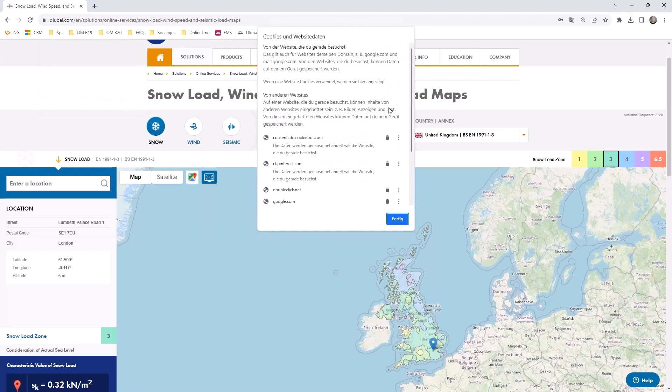So this is data saved on the computer to quickly access a page, but it might be necessary to reload it. Then you can select if you want to allow all cookies again, and the frame should load again for you if it did not do before.

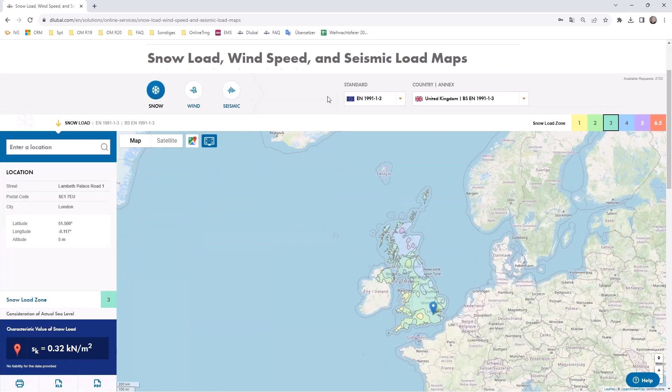So let me quickly sign in so that I will have enough requests for today. And let's go again to the snow load map. I think you're already coming to it.

It is not available yet for every map. I do not think that it is available for Great Britain. Oh, it is already - in my tests it was not available. Okay, so we can use, for example, Great Britain with the Eurocode 1991-1-4.

And then you see the small button on the left bottom of the page, which is still announced as being a beta. So please double check the values if they are correct, you can do that in RFEM, or at least be suspicious if they might be correct. It's still in beta mode, but we do not want to not present it, so you can think about using them.

So if you once click on the button, you can already see the three diagrams you can now gain. It's not only about the basic wind speed - you directly jump into the map and parameters according to the Eurocode, and it will create the diagram over a certain structure height.

So if you would adjust to over 20 meters in here, you would see that the diagram will of course be adjusted, and you can as well jump into the wind profile tab in order to copy paste the values with the level.

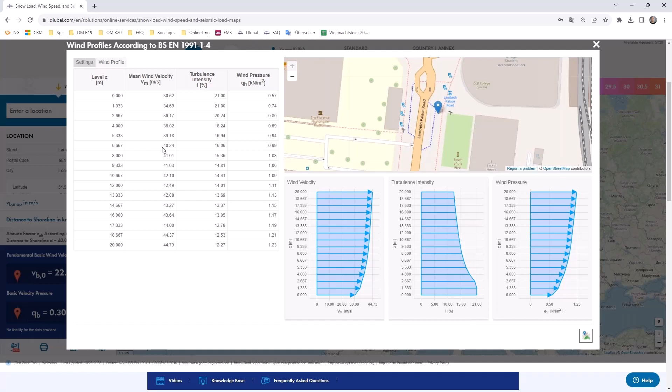What is then necessary if you jump into the RWIND main program is the definition of the wind profile and turbulence intensity profile. You can also choose that you want to have a user-defined definition and adjust all the values you see in over here. You also get a closer look on the place where you are.

You can also switch off the map if you rather want only a big display of the diagrams. So just to remind you again, it's still in a beta phase, so it might not be available for every standard we provide, but this might be quite useful for you if you use RWIND without RFEM 6, or if you want to compare your hand calculations, or if you want to compare our calculations and tell us something might be wrong or not.

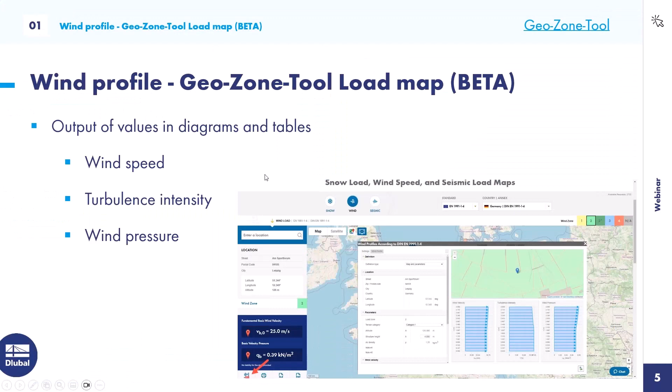So this was something not directly linked to RWIND. Let's now jump into the main part, our program RWIND. And this is my summary of the four features I would like to mention.

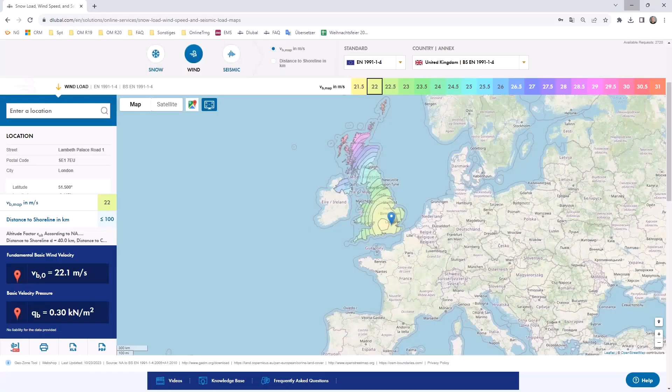Maybe you are not yet used to it, but you can also find all the data in our extranet. So if you log in with your account and go into the development tab on this page, you can see features and also bugs. This is most likely the place where you can inform yourself of what is new or what was fixed.

And if you then restrict it to RWIND - this is in German, depends on the language set in your account - you can see that these features were introduced into the 4th version or the 3rd version and so on. You could also check into the bugs which were fixed for certain files.

So what I would like to talk about now is the first feature, the generation of zones from RFEM surface numbers. The next one will be the support for verification or experimental data - this will be the main part of today's webinar. The next is a new scaling function for the wind tunnel optimization, and last but not least, we will quickly step into the display of maximum and minimum values in each time step. I have one slide for each feature, and then we jump into a small file in order to check where you can find it.

So you are now able to generate zones directly from RFEM surface numbers, of course only if you use RFEM 6 and then hand over the model to RWIND. We will now also hand over the surface numbering, and then you are able in the edit part of RWIND to generate zones from surface numbers.

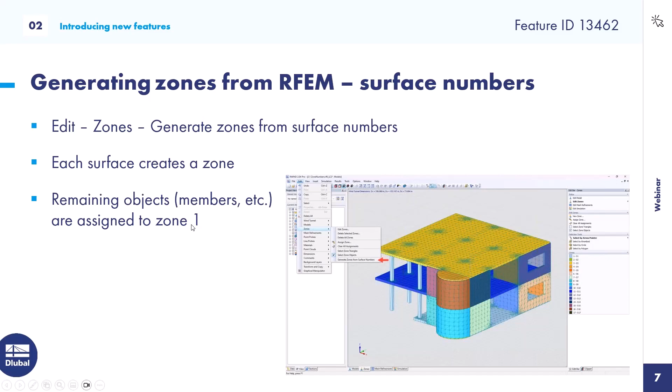Each surface you can of course split as much as you want in the RFEM main model will create a zone, and remaining objects - so you may also hand over members, they will also have triangles - will be assigned to zone 1. So that's a bit of a complication, that they are assigned to zone 1.

Let's step into my example file, also installed, the concrete building where I switched on the surface numbers. You can see we have surface number 1. If you do not want that surface 1 also includes the member triangles, you just have to go into the table and insert a row, so the surfaces will not start with 1, and everything else will be synchronized in the back.

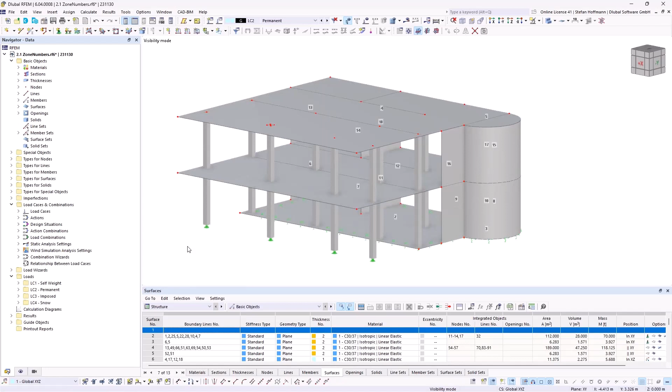Now we have surface numbers starting at 2, and everything else may be handed over to zone 1. If this is not fine enough for your differentiation, we will also see it in the main example later on. You might also right-click and divide surfaces with intersecting lines in order to create multiple zones.

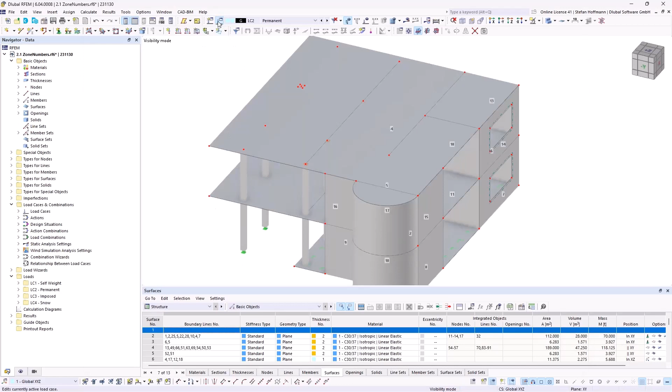So let's quickly create an example wind simulation load case. We will not care about any settings that are able or necessary to be taken. We will just open our model in RWIND, which can be quickly done by the button I used. So our geometry is handed over, and now there would be only one default zone.

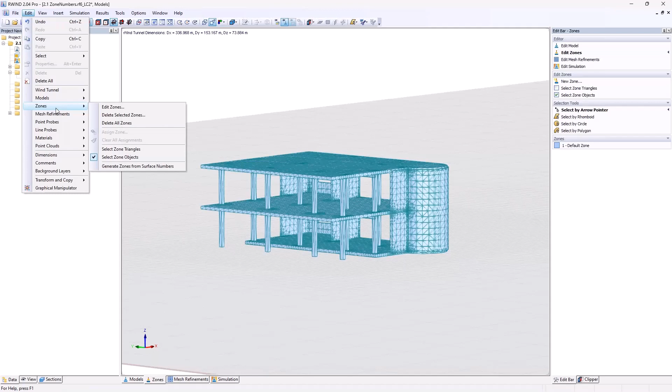It is possible for you now to hit Edit, Zones, and generate zones from surface numbers. You quickly see that there are now a lot of zones created, and you do not have to do that manually - you don't have to create a new zone and use the selection tools to gather all the triangles which might be necessary for your file.

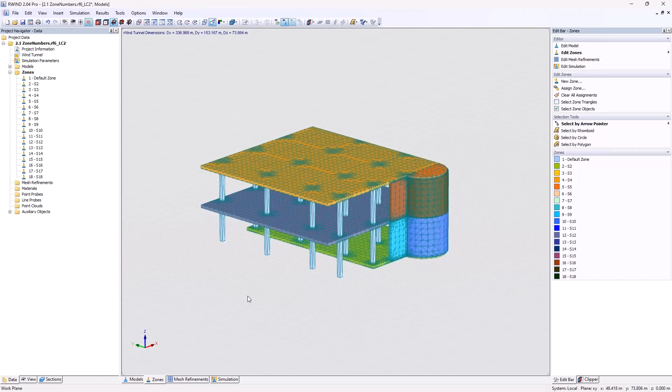If you already consider the surface numbers or a certain division in RFEM 6, you can directly create these zones in order to quickly evaluate, maybe, normalized pressure over a certain zone. I will later on show you how we use it on our monopitch roof.

As told, you can see there's of course also the default zone number 1, where you will be able to find every other stuff which is not related to a surface number.

Okay, so this was the first feature I wanted to talk about. We will use it later on in the next example. So let's close everything and go back to my presentation.

The next one is the support for verification and experimental data. We now offer the possibility to enter verification data into the table. This is linked to point probes and pressure values, which you can enter. You can then display the data in graphs using labels, the normal point probe labels, but you can also do a graphical representation of the differences between the verification data and the simulation results.

You can switch that in the result navigator. You can also choose about the extrapolation of the data on the surfaces in RWIND using two methods, which are introduced and explained in the manual. You can also restrict the verification data to be extrapolated to a certain zone, and we will later on use that in my main model.

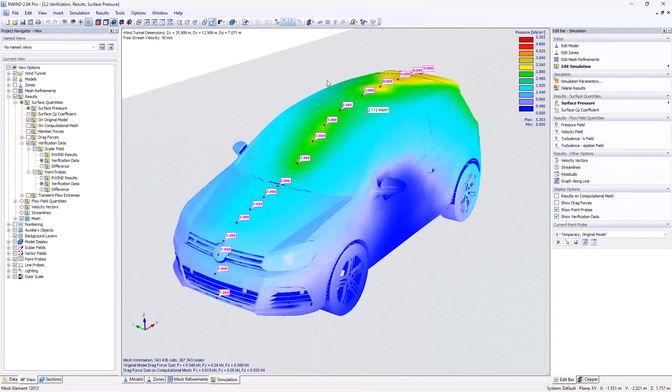But in order to introduce the verification data first, I use the Volkswagen Golf, an example already installed with RWIND. I have already defined a point probe and activated the option for it. It might be, of course, a bunch of probes you want to enter if you want to define certain values for zones. We only did one point probe here, and if you activate the verification data, you get one more table over here where I have entered random values.

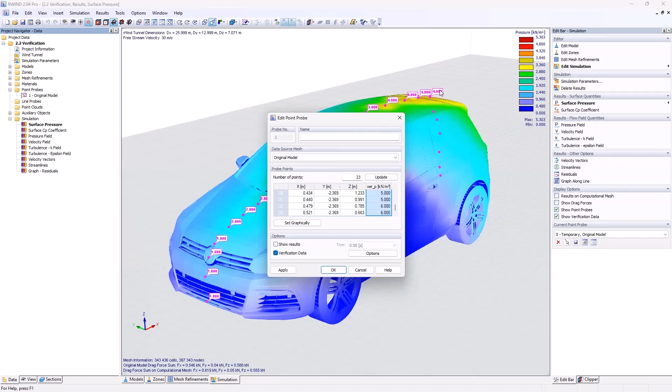So they do not come from any tests - I just wanted to show you the labels so you can quickly estimate where they are and what they are doing. Then you will also be able to adjust the verification data options.

So you can choose about the interpolation method, which is yet fixed to all point probes - you cannot yet differ between Gaussian interpolation or diffusion - but you may set a different data range constraint for certain zones. We will see that later on in the other example. If you do not know about Gaussian interpolation or diffusion, you can just hit F1 on the keyboard, and usually it should be linked, but maybe we did not yet do this.

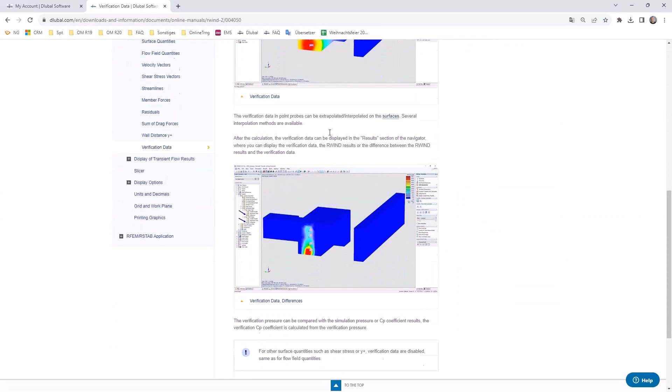So you can quickly search for verification, wait some seconds, do not wonder if you do not need to hit enter, and then choose the topic, which may be about verification data. So there is some general part of it.

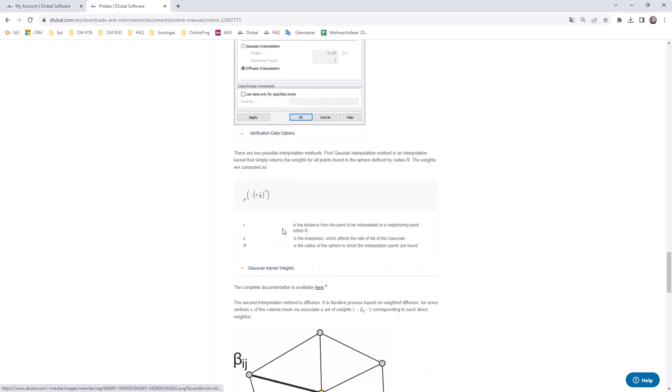And if you go into the probes, we quickly search it, then you can see the explanation about both interpolation methods. Just scroll down and you will find the information about the second interpolation method, or also about the other ones. We will not go into the theory behind it now.

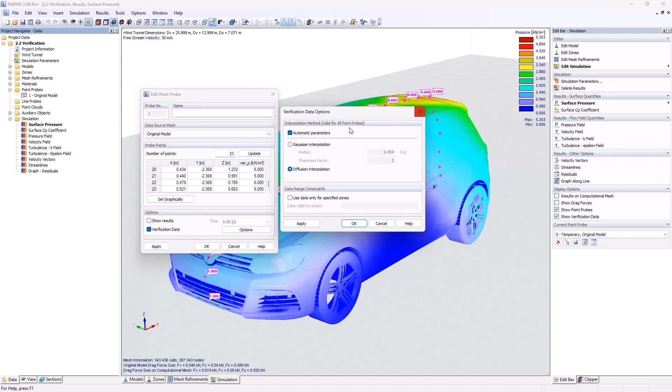What I do remember myself is that this will most likely diffuse interpolate about a whole area in slides, and with the Gaussian, you can set a radius which will interpolate, but we will once again later on show that.

And if you have these results, you can always differ between the verification data of the scalar fields and the point probes. So you can step over and show the results you get from the numerical wind tunnel analysis, and then also switch to the verification data. I think the biggest influence will be the difference, so you can directly check.

According to the colors, how far is our calculation maybe away from the standard, which does not really mean it must be far away from the reality. There's always the question, how can we verify our model? From my proposal, every FEA or CFD analysis needs to be verified by a wind tunnel experiment, and then you can enter the data and check if the assumptions in this complex CFD analysis match with reality.

We will later on use that feature once again. So the next part is the new scaling function for the wind tunnel optimization. You are now able to define scaling factors to automatically adjust the dimensions of the tunnel, and you will be able to save the user-defined scaling factors.

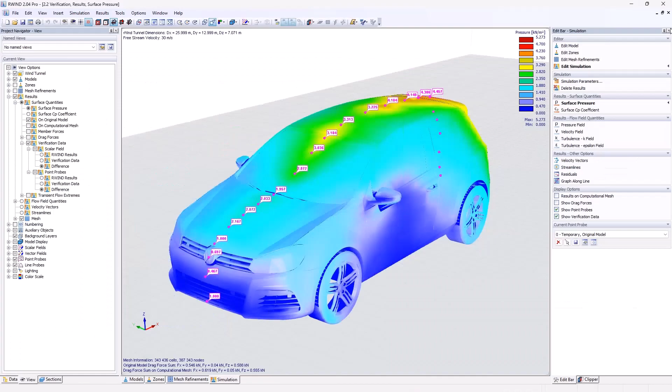Let's quickly jump into the example, which is once again the Volkswagen Golf car. Then you usually double click on the wind tunnel. Let's zoom out a bit, and see these automatically adjusted values.

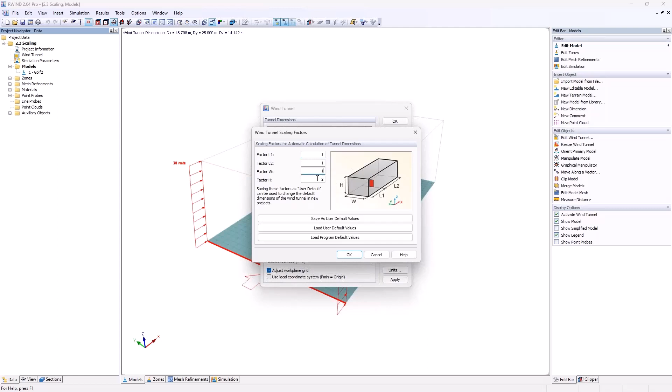Then there is a button for the scaling factors where you can now define your own values. Usually it is multiplied with the normal values you have in the program. So this is the wind tunnel the program will offer you, but we propose, most likely if going into a more detailed calculation, a recommended wind tunnel size.

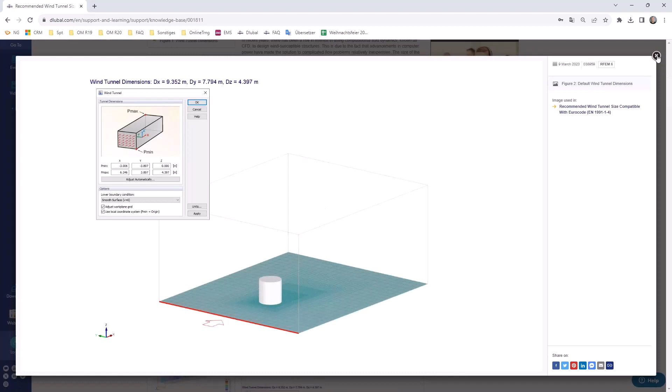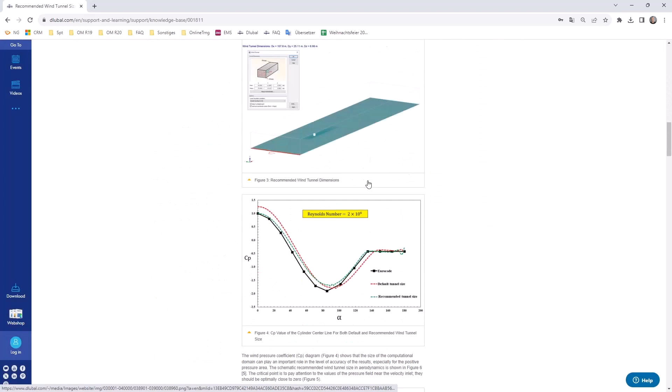I already mentioned this technical article by Mr. Katzemian in a different webinar, but I would like to put some effort into it again, because it's quite necessary to think about the dimensions. If you compare the standard dimensions to get a quick estimate of the wind load pressure and the recommended size, which of course extends the calculation time a lot. If you want to compare values to the Eurocode, you can see the size will be much bigger.

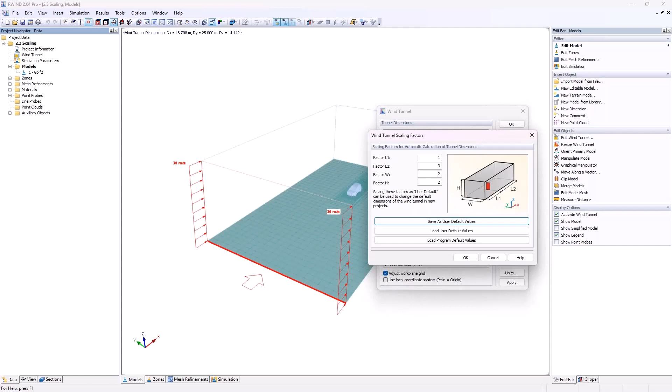I did a quick estimation of what the values should then look like. If you would like to match the technical article, I do not like numbers with commas, so it would be 2.7 in this length, 1.6 in this direction, and 1.85 in this direction. I would use 1, 3, 2, and 2, and hit OK.

Then you will be informed that these are just the factors used, and you have to use the adjust automatically button once. If you then hit OK, you can see it did not change a lot because I think it was already bigger in front, but your wind tunnel will be adjusted according to the factors you enter here.

So if you put 10 inside it, say OK, and adjust it, then you can see that this factor is going to be increased a lot. This gives you the possibility to not think a lot about meter values, but to quickly enter your factors, save them, load them, and apply them on your model.

So the last feature I would like to present today is the display of the maximum and minimum values in each time step. This means it is for the transient calculation, limited to our RWIND 2 Pro version. It will offer you some kind of envelope for surface pressure or CP coefficient values.

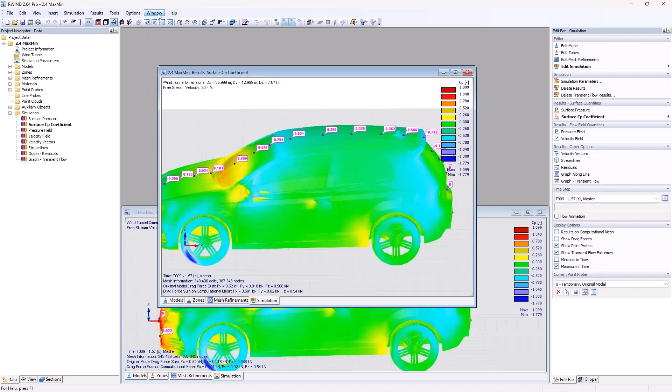So let's jump once again to the golf car. There's also a transient calculation file for the golf car. Usually if you do not show the transient flow results, you will have a slider over the time where we can see, most likely on the back part of the car, that the pressure will of course change over time, due to the wind acting, of course, turbulent.

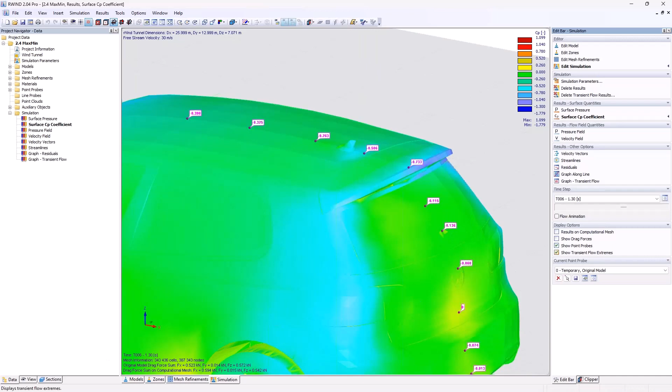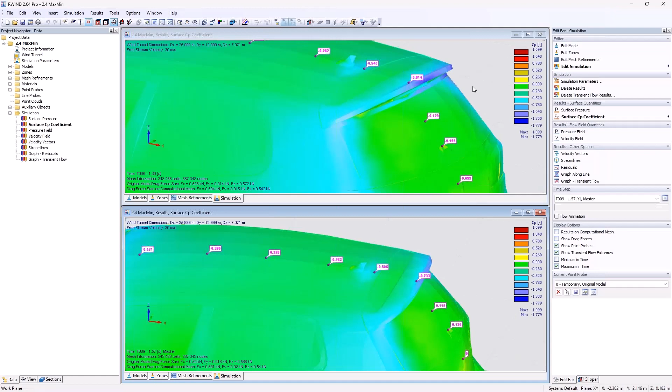Or if you are lazy and don't want to check that, you will now be offered to show the transient flow extremes. If we use 2 monitors, we can show the minimum in time, which might be minus 0.814, so it's the minimum with a minus. And we can also choose to show the maximum in a time. So this same point probe in a transient calculation over time would gain values of minus 0.733 or minus 0.814. So this is one way to determine the maximum or minimum values for your structure or your file.

You can also switch that value in the view navigator, but I think the quickest way is to do it on the right.

Okay, so this was kind of a slide presentation, but also stepping into the program. Now I would like to show you how we can use the feature of the verification data on an example. It's a building, 10 meters long, 8 meters wide, 4 meters high, and it has an angle of the roof of about 5 degrees. So it's a monopitch roof.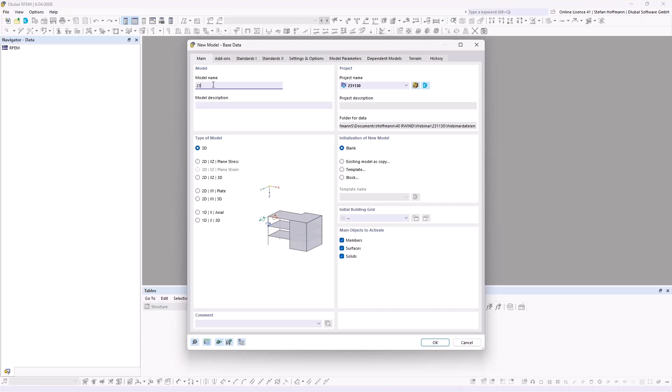So we will start with a fresh model in RFEM 6. Let's give it a name, so it's the name of today, and it's called monopitch.

What we need to activate - we will not do any design to elements, so it's just really about giving our model into the wind simulation analysis and gaining the pressures from it. I will only activate wind simulation. I could activate all because I'm working for Dlubal, so I'm not limited to any add-on, thanks to that. And we will do it according to the German national annex, because we are quite used to do so, and we also tend to present our English webinar for the German annex.

What you can now also do is choose a location in the GeoZone tool if you want to - we will do that later on. And you could also define a terrain. Just remember, it is possible, but since we would not like to have any influence by neighborhood or by the terrain, we just skip that.

So once the file is loaded with all the data used before, remember that the first angle of wind simulation load is going into the global X direction. So I tend to rotate my model because I dislike to rotate the wind load.

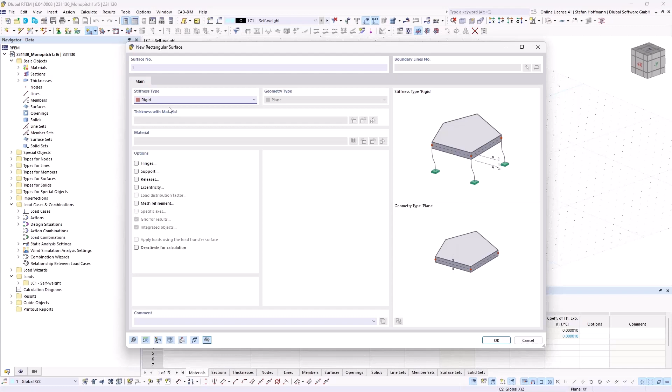And I will now start by modeling the bottom plate. I will simply use the rigid type because I'm only interested in my wind load on the structure, not in any design yet for the building. So it does not matter if it's concrete or metal - we can just use rigid because I do not account for any stiffness.

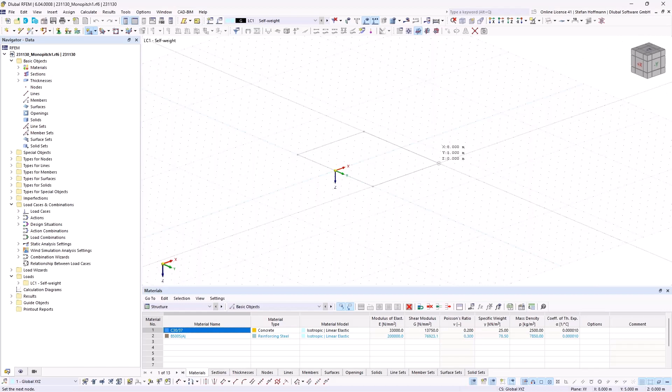So now I told that it is 10 meters times 8 meters. So we would now need to define this size in our program. So where did I choose it? I'm starting at minus 0.5, and we're going to 5 and 8. So this will be the bottom plate.

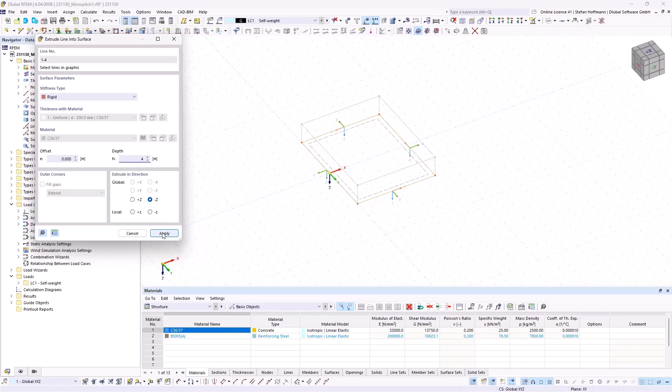Then we can simply, with the control key on the keyboard, mark all the lines, right click on them, and extrude them into surfaces. This will offer you the possibility to quickly model a surface. We will once again use the rigid type and the height should be 4 meters into minus z. We apply that, and we most likely have our hull already.

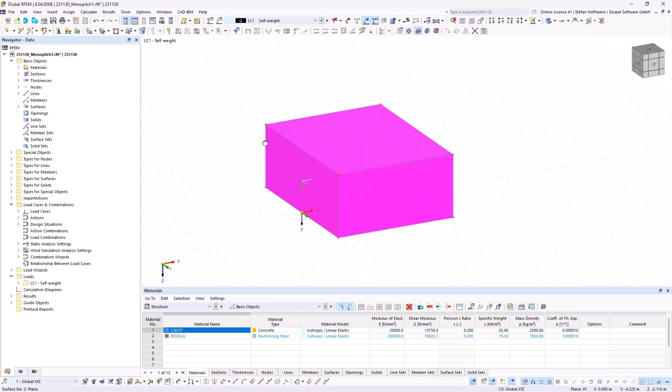You can of course switch into this display if you like it even more. Then I would just mark my bottom surface and copy paste it with the control keyboard and snap it to the top. We of course need some boundary conditions at least, so I would just apply some line supports, being some singular foundation on the length. And then it's of course about to define the angle.

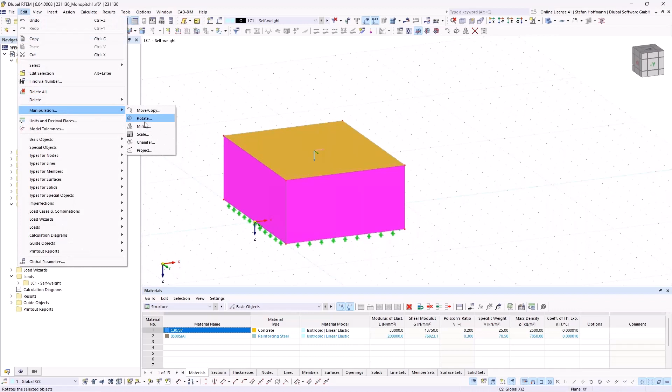You can quickly do that by simply hitting the surface and using the manipulation tool to rotate it. So you can now decide that you want to rotate it, for example, 5 degrees. Due to our wind load assistant, I use 5.01. And then we need, of course, to think about what will be the direction.

So it is about our y-axis. This is the turning point, and it should be into the z direction, so we want to have it into the global z direction. Since we use this point already, you don't need to choose it, but we can of course choose a node in here. And if we hit OK, it is moved.

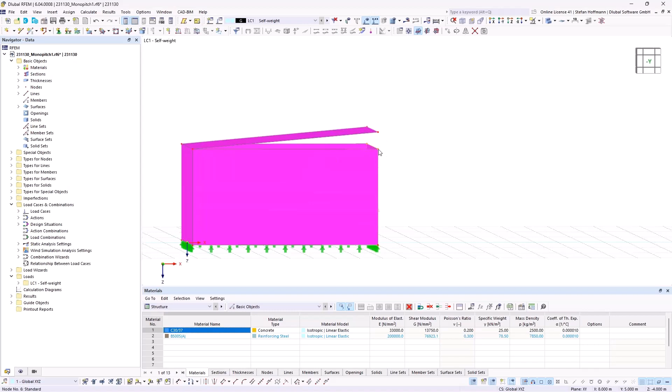Since I only selected the surface, all other combined elements are not moved. So we could simply mark everything before, or we now just mark both nodes and drag and drop them to this position. Then you can see that the surfaces are quickly adjusted. So it's quite smart if you would like to model this close to a CAD design, I think, since you can use drag and drop and so on.

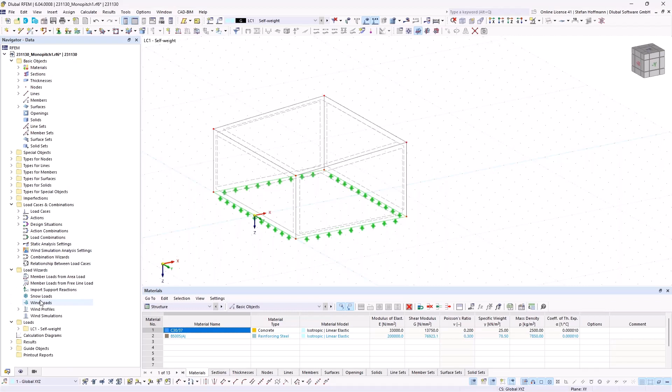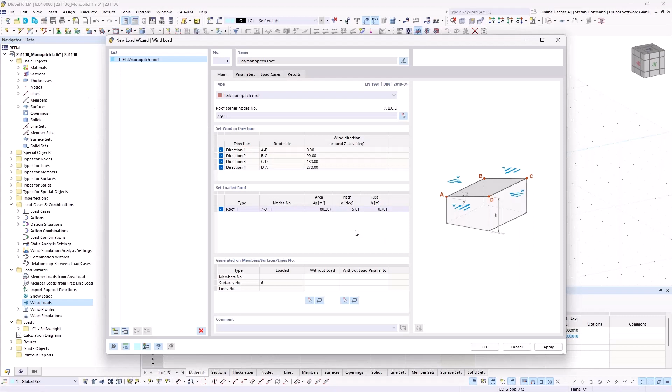So the next thing we would like to do is, of course, to check the wind load areas. We can do that with the wind load wizard. This is not RWIND, this would be the standard approach. We are now only interested in the mono pitch roof, and then you see the picture of what 4 corner nodes you need to choose. So we simply pick our 4 corner nodes and hit OK, and then we introduce the parameters.

So now I hit the button to jump into the GeoZone tool, and I will use the location of Leipzig. It does not matter where we are. You can see that the German standard will choose wind zone 2. I will load all the data, and it will gather all information from the GeoZone tool, so we do not need to enter it manually.

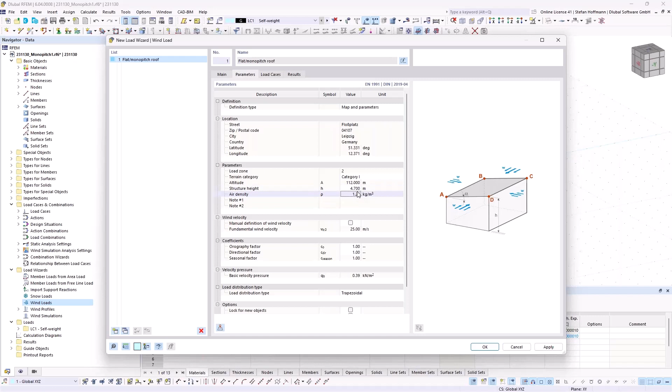And then I can adjust the structure height, which is roughly 4.7 meters, and we will use terrain category 2. If we do that and create all the wind load cases, we can quickly estimate the results already.

So you see the load directions and you see that our zones will be split. If we jump quickly back into this part, we will be given all the data that the standard provides. So the width of zone F, so E divided by 4, is 2.35 meters, and E divided by 10 is 94 centimeters. So you will be given this information.

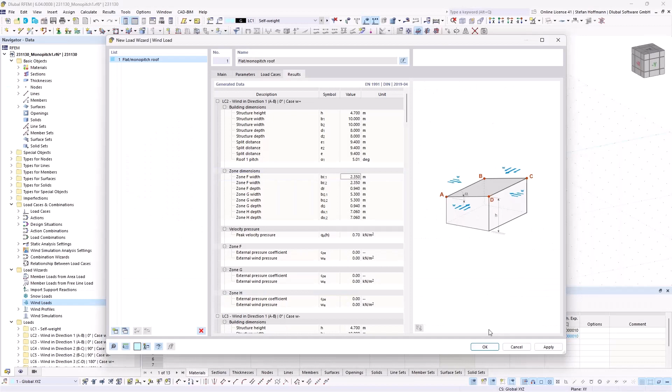This is why we do it as well, shortly, with the load assistant. And if you display it, you can see that this is the load or the suction we are going to experience in our wind, and we will then check it.

So let's continue. What we now want to do is already define zones, so we would like to split the roof into parts. For that, we would like to have our lines showing into the same direction. So now we can use both lines, hit the right mouse button, and divide the line via distance.

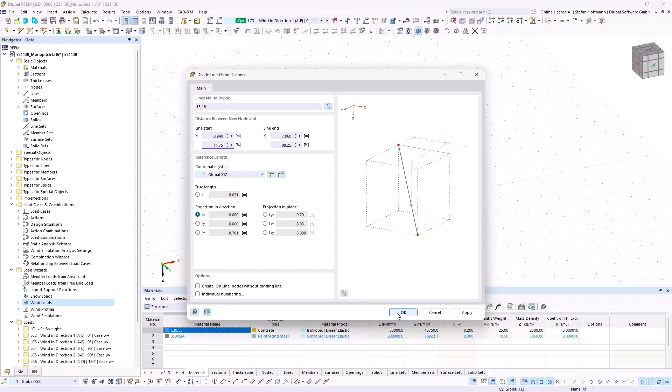So now we could just simply enter 94 centimeters, but it is meant as a projection showing from top. So you are now able to use the projection of the line into the local X direction. You can enter 94 centimeters in here, and if you do that and hit OK, you can quickly divide the line using it for further modeling. We will now simply draw a line into here and have the line which is going through, and then I told that the distance will be 2.35 meters.

So we will use this line and also divide it with a distance. It's not about the projection, since it's the same either way. We'll split the line at 2.35 meters, and also divide the line at the distance at the end, 2.35 meters. So now we can simply mark this node and copy it from this point to this point.

Or you can try to hit the tool in order to snap the perpendicular part, though I'm not sure if I activated it. So I'll just simply use this line as well and copy paste it over here.

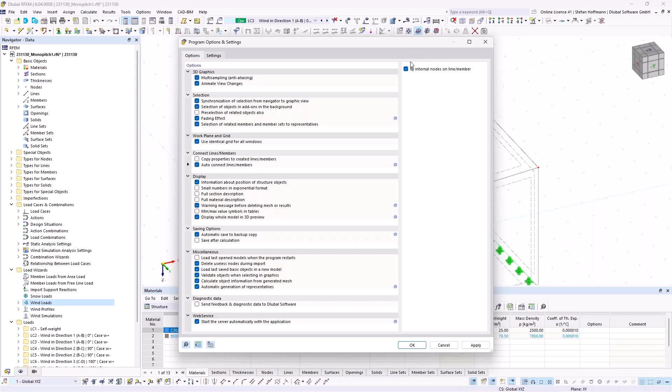If you're curious why red or blue nodes are created, whether the line divides or not, you can step into the program options and choose the setting for what it's supposed to connect, members or lines. If you don't manage to do so, you can later use this function, go over and check if the lines will be divided.

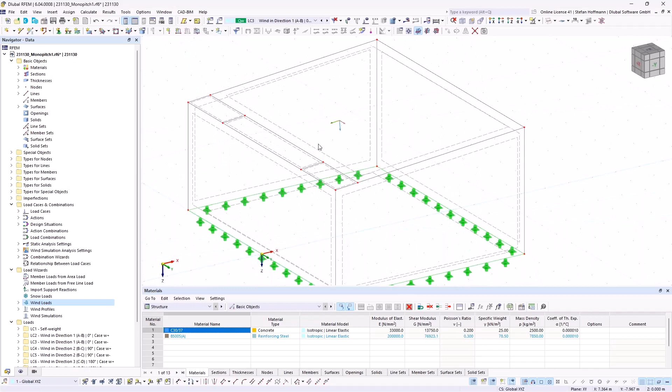So the last part we need to do in order to have certain surfaces is to right-click on the roof and divide the surface with intersecting lines. And voila, we now have 4 surfaces for the top, giving us 4 zones as expected, which is what we'd like to compare with our experimental data.

So this is a way, one possible way. If you have a quicker one, of course you can also use your own way of modeling.

Next, for the wind analysis, we need to step into the mesh settings to check what wind simulation options we'd like to use. You can think about the level of detail or simplification of the model, and about only visible objects being handed over. Since we don't have members, we can just deactivate this option.

We will also not hand over any terrain, and we will also not hand over any surrounding models.

Since we use rigid surfaces, we don't need to think about surface thickness. Running RWIND in silent mode is mainly useful if you have a lot of load cases and don't want to double check them or manually start the calculation in RWIND each time.

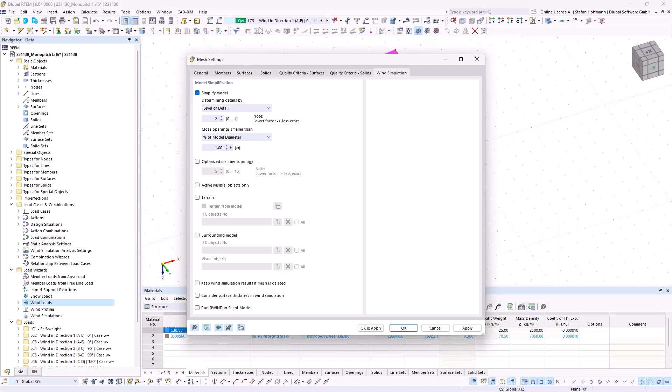You can disable this button, and once you calculate a wind load case, RWIND will open and you'll be given the option to adjust everything you'd like, so you can double check the model and then start the wind calculation yourself.

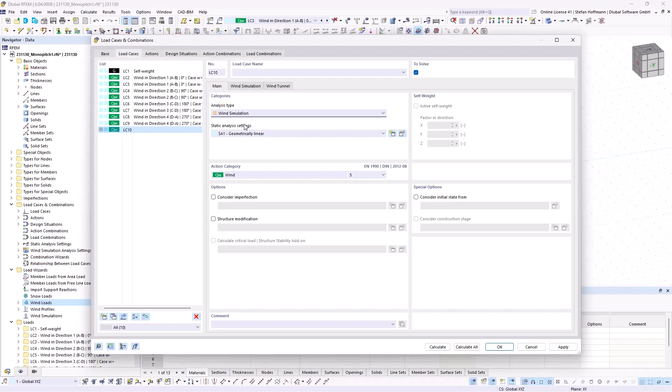The next part is that we need a new load case, of course. It will be the action category wind, with the analysis type wind simulation. Then two registers will open on top, where you can choose further settings for the wind simulation.

So the first one would be the wind profile. If we step into it, you can see this is once again related to a certain location, so we check Leipzig again in order to load the data inside it. You can also manually define it if you want to.

We would just change to category 2. The height is taken automatically by the program, and we will not adjust any other factor inside this. There you can already see the profile, which should match the ones I showed in the beta phase, though due to the beta phase there might still be some adjustments.

Using this button, you can switch between the turbulence and the wind profile, or you could also see the wind velocity given in the tables.

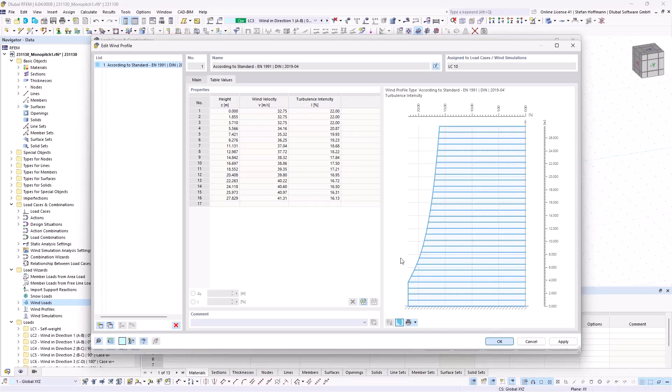Once defined, the last part would be to double check the wind simulation analysis settings. So whether you'd like to do a basic steady flow calculation or a pro transient flow calculation is always up to the structure and turbulence you're expecting.

We will simply do a steady flow calculation, using the presets given here. And if it's up to certain controlling standards, we would propose to also activate the boundary layers, but for this, please check out our technical articles, because Mr...

Kazemian did provide a lot of verification examples and also a lot of nice-to-know facts for maybe beginners in a CFD analysis, because we offer a tool with a quick estimation of results. There are still technical parts behind this you may be curious to know about.

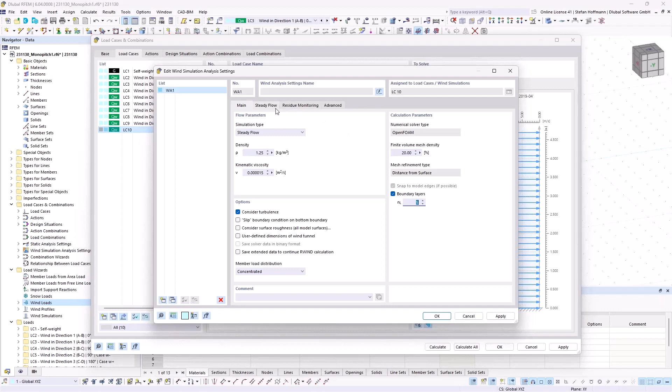There are other things you could adjust, but we will just leave it like it is. So if we now hit OK and start the calculation of LC10, you will see that it will now hand over our model to RWIND. It will start RWIND, and we would now be able to do the stuff we would like to do.

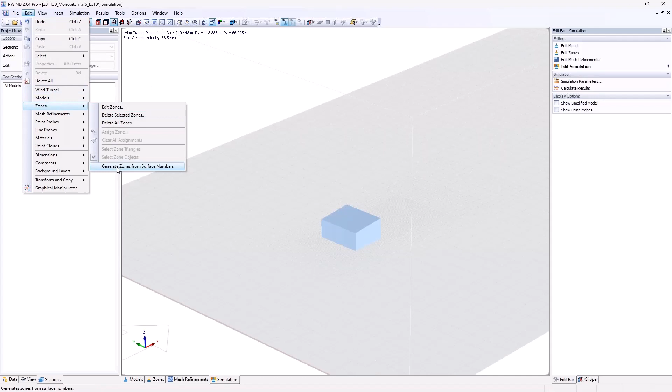So currently it would be necessary to manually generate zones from surface numbers that you can later on use. Of course, we are planning that there should be some automatic option, because usually it might be wanted that you would like to automatically create zones.

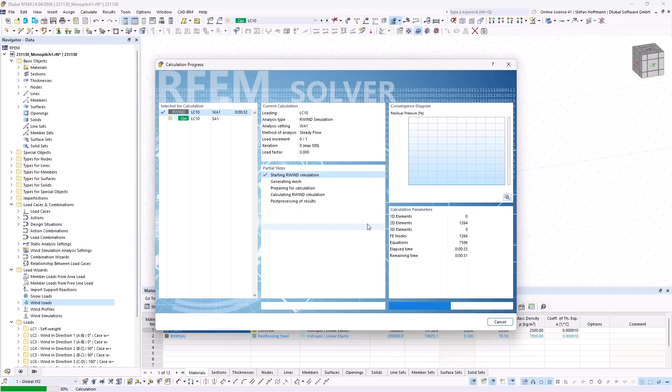If everything is done, we could now start the calculation, but since this will take 5 to 10 minutes even for this file, I will not do it live. I will open my already calculated file, so of course RFEM will give me some error. Okay, I did already run the file for you.

So let's make a jump into time. 10 minutes passed, we now already have our results on the model. Let me quickly just delete the line load I already defined in here. So we have already our zones being defined. Our zone, I always have to double check.

Zone 7 is the big part H, 8 and 9 is F, and 10 is G. I hope I will remember it. If not, I will have to double check it again.

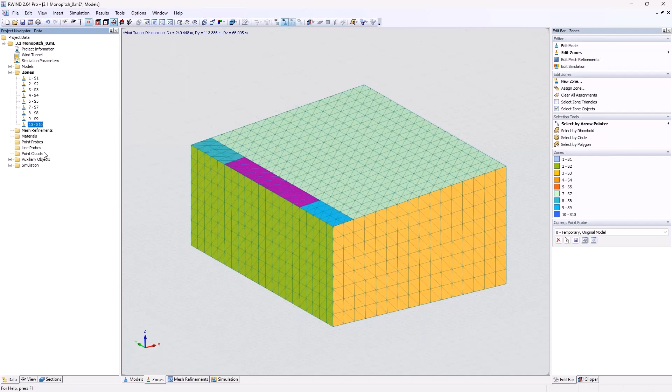So what we are given now after the calculation is, of course, the pressure for our front and our roof, sides, and so on with certain values. And now if you would like to compare that to different standards or to your analysis, we will define a new probe.

I will name it F for the zone F. So this will be these small parts in our model. And then we will define it on the original model, sorry, on the original model.

So the original model, if you are curious on what the model measures are about, there is a big chapter in our online manual, because this is one main part of RWIND: that we give maybe a non-topologically correct model from RFEM to RWIND. It will create a fine mesh for the CFD analysis and transfer back the forces onto the model.

So let's start by setting point probes graphically. We are now only interested in the roof, so the part F. I will use 2 probes over here. You will see them soon.

I hit finish, and then I will quickly switch to the RWIND results, because it was still set that we show the verification data. And then we can see that we have those 2 point probes giving the results at this point for our zone.

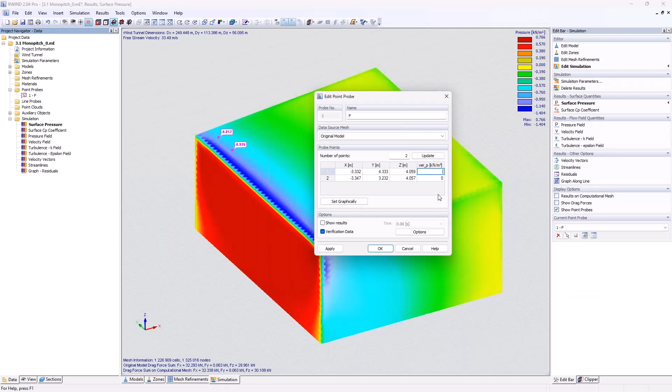And if we now would like to introduce verification data, we just apply this button and we will check what the standard is thinking of. So it's minus 1.19 kilonewton per square meter. So let's enter minus 1.19.

Oops. And quickly check that this will only be used now for zone number 8. And let's use the diffusion interpolation, say okay, and let's quickly switch the data to the verification data, because I think this is a smart way to see what the logic is doing behind entering these probes.

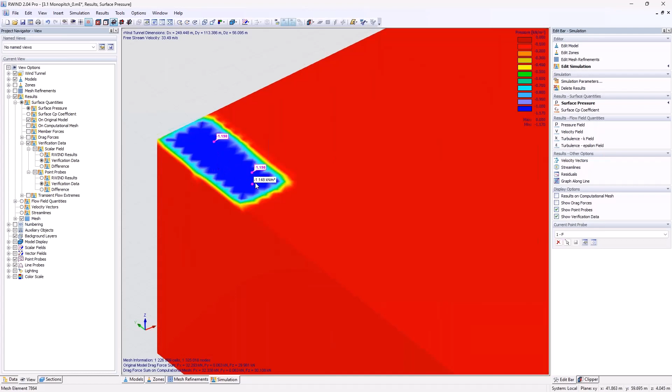We now inserted 2 probes for the zone. We restricted it to be only interpolated in this area. So what it tries now, of course, is to keep the minus 1.19, and towards the boundaries, to the other surfaces, it tries to interpolate.

We will now introduce some more points. So I will just enter one more in the other area, say okay. We go in there, it already has the latest value.

And if we would switch now to the Gaussian interpolation with a radius of 0.72, hit apply. Okay, let's put this window in here. We will see that nothing is done in here, because keep in mind, we restricted it currently to 8.

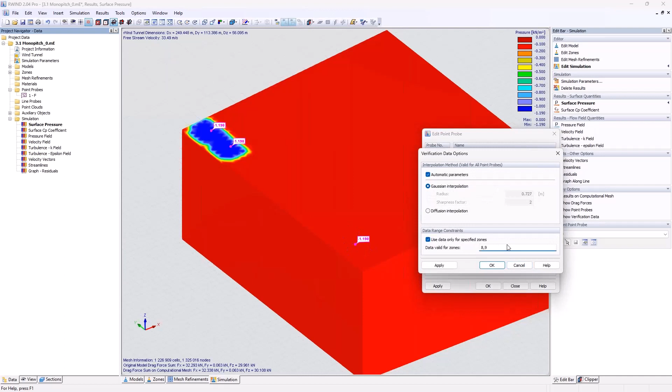We can also restrict it to 8 and 9. And then we see that the interpolation is done in a bit different way compared to diffusion. So with diffusion, it is using a wider area, and Gaussian is using the automatic parameter defined in here.

So it's a radius around the dot of 73 centimeters. We could also uncheck the button and increase or decrease the area, depending on how many probes you would like to set.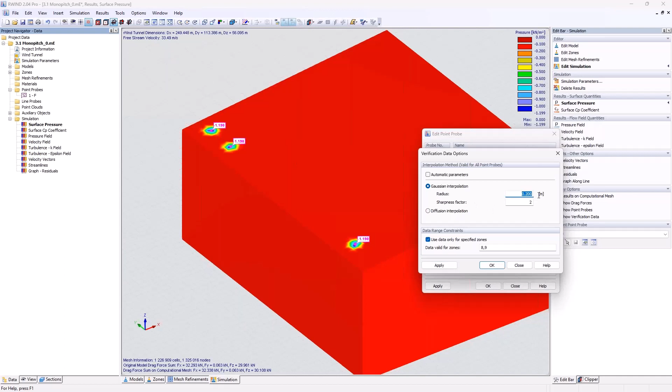In a normal wind tunnel analysis, in reality, you have a certain amount of probes over the height. Since this would extend my webinar to more hours to introduce such an amount of probes, we will only use 1 probe this time, and simply increase the radius, for example, to 3 meters, because this way most of the zone will be covered by my defined verification data, and all the other stuff will be interpolated. So we will set a new probe for the next area.

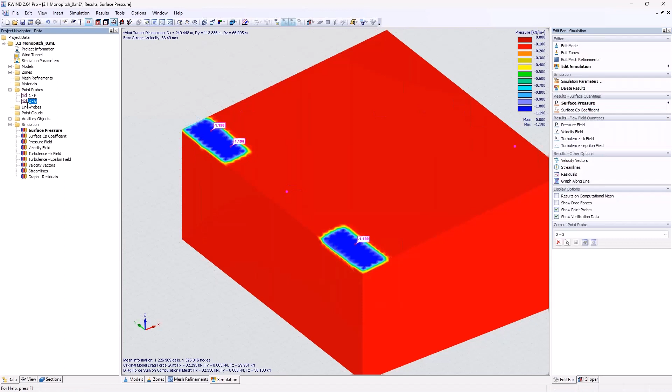So this would be G. We will set it graphically, once again only using 1 dot. It will be more usually... I set 2 by mistake, so let's only keep the first one we used. You can also later adjust the values we used here if you need to.

We will now once again define the verification data for this part. Let's jump back - should be minus 0.84 according to the standard. Let's enter it. As you can see, this part on top is limited for all probes, and we will define this probe only for part number 10. You can see that it will interpolate between the zones a bit better than before. So now we have already defined 2 parts.

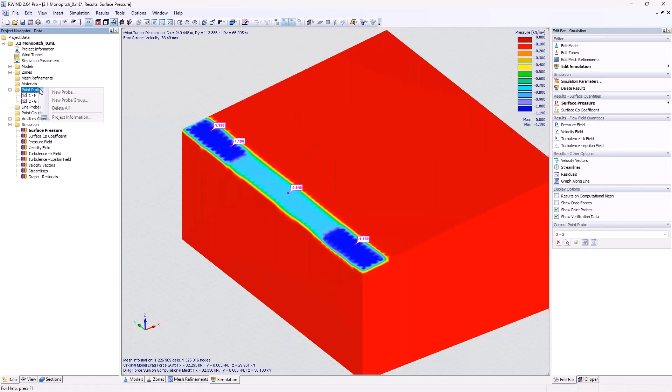Let's enter our last probe, which would be about the H area. Once again I only set 1 probe there. We define the verification data, which is supposed to have minus 0.42, and we assign it only for zone number 7.

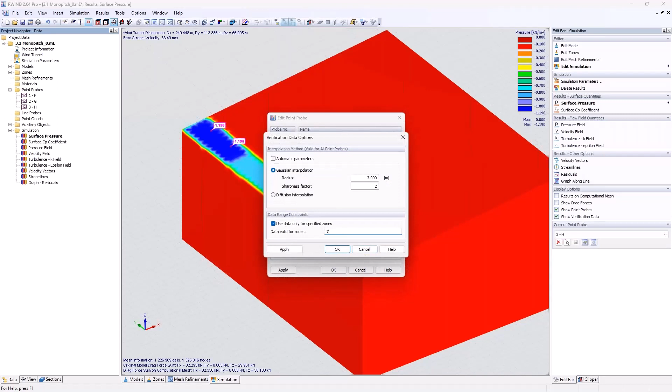If we hit apply, we can see that our radius is, of course, since the zone is about 7 meters by 10 meters, it's way too low, but it doesn't matter. We can increase the factor here, for example, to 6, to extrapolate our value to the whole zone.

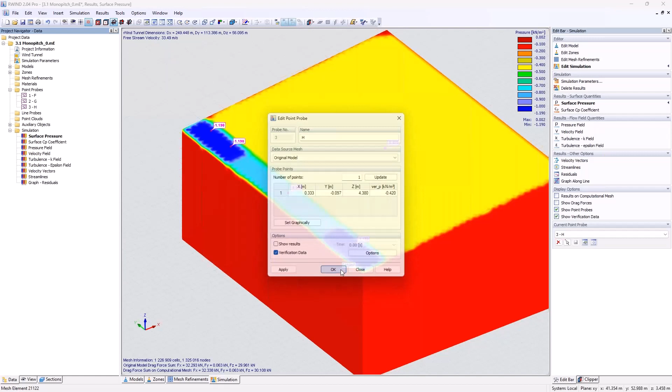So if we did that, we now have a smart graphical representation according to the values. Of course, the standard is offering some summed up value amount for the zones, so you would only have yellow, blue, and light blue for the zones, which might differ from the reality values we achieve.

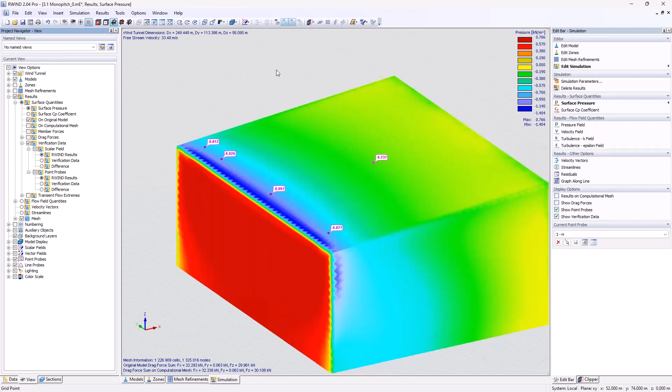Now we can go into the View tab and say, okay, these are our RWIND results. You can see the probes also show the values our RWIND is giving us. This is the verification data, and now, big drums.

We can now also check the difference about it. Let me quickly restrict our zones only to the roof - you can do that usually in the section tab. Then we can see that the dark blue would be a difference of 0 most likely, and the wider away we are, the bigger difference we will have.

But of course, the standard is not really taking into account maybe a finer determination of an area, so we might have some bigger differences compared to the standard.

What I did not do is a long calculation. So what I did is use the recommended wind tunnel size, but only with a model simplification factor of 2. This is not the best calculation giving the best results, but some quick results.

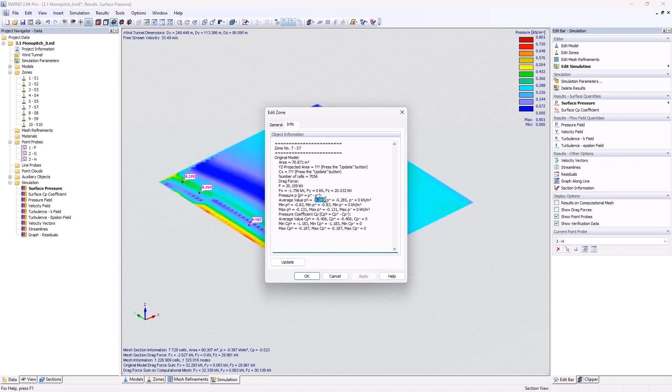We can see that we are, of course, away from the standard in certain areas, but you could also try to double click on a zone. So let's, for example, use zone number 7 and get information about the average values inside the zone, in order to double check them and compare to the standard.

So this is most likely the biggest new feature we introduced for you, in order to compare the results with experimental data.

So what you could also do is enter more probes, define more areas, and think about what verification interpolation you are going to choose.

So I was just about to jump into the point probes, but maybe my computer does not like it. Okay, so I was most likely even done with this. So let's continue with the presentation. I see I'm a bit ahead in time, but I think this is no problem.

So last but not least, the prospect of today. We of course try to constantly expand our database of verification examples. If you do not know, you can find them in our download area. There is the verification example area where you can filter for RWIND and RWIND 2. And there we provide already some validation, for example the latest one, a comparison to a Japanese wind tunnel database, where you can see that zones were created and double checked and compared to the standard.

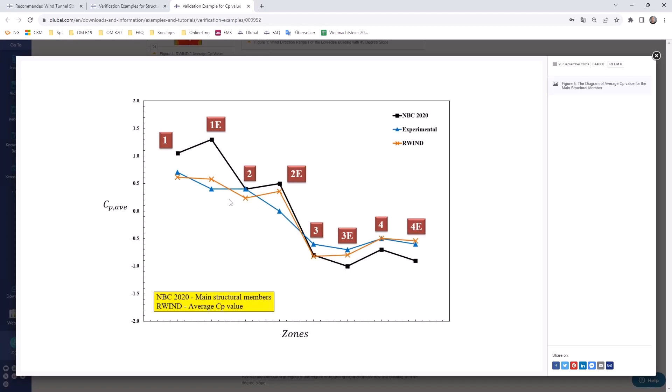Where is the experiment? Where is the standard? And where are we? So it's not about judging what is the correct result, I think, because nobody really knows what assumptions the standards really did in the past. It's most likely just about getting a feeling, is my CFD model matching with the reality or not? And maybe I can even get lower values, which might be more economical, but still on the safe side.

So you can find all the input values, and if you scroll down, there should also be the model to download. So you can already gather these models. Maybe if you have a similar model, put them into the tunnel with the settings we did, let them run, and then gather the information you may be curious about.

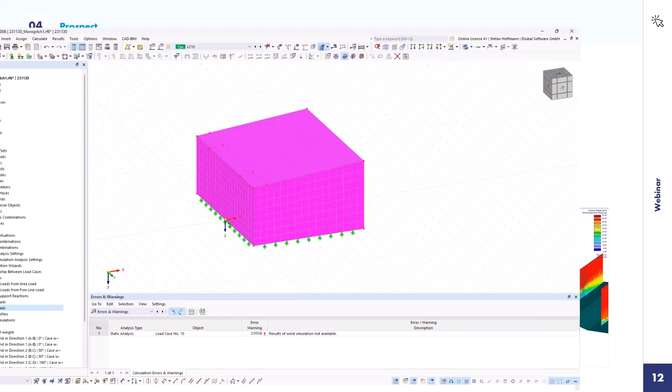What I did not show this time in the webinar is the connection of the results from the RWIND to the RFEM GUI. So what we are going to introduce more is that you can run RWIND as a solver in the background. There is a tab in the wind analysis load case that you can switch to the RWIND results. Currently, I think it's only the pressure and the CP coefficient being drawn in over here in order to be evaluated.

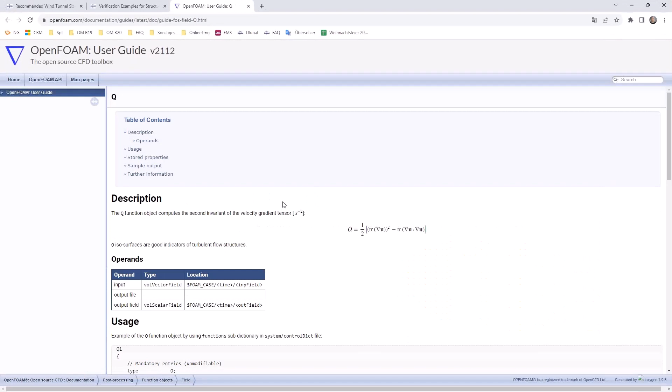We also plan, that's not fixed, the expansion of the result values as Q-ISO surfaces. I never heard about them yet, but I'm not that scientific a CFD analyst. You can find in the OpenFOAM user guide information about what this vector field is about, and if this is useful for you to evaluate your model, you can check out these results hopefully in an upcoming version.

And last but not least, beside all other features planned, we are of course planning to offer more wind tunnel scaling options that can be transferred from the RFEM GUI to the RWIND GUI.

All right, Andreas, so I'm a bit ahead in time, 5 minutes, but maybe you can close the gap, and I would hand back over to you. Okay, thank you, Stefan, for this nice presentation about the current state of RWIND. And yeah, we're quite curious if the features are integrated in the program in the next time.